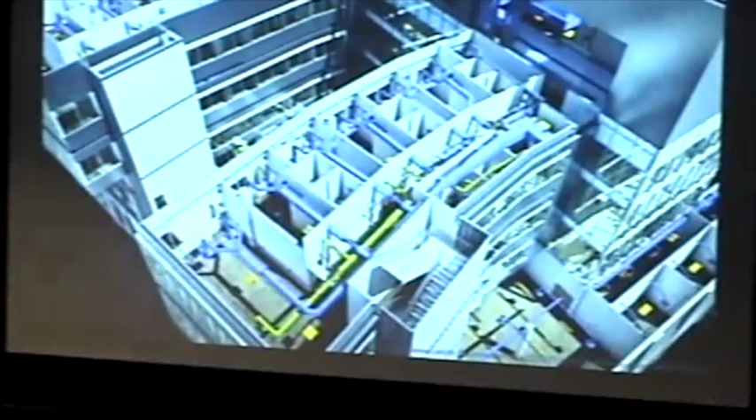From one side, we've tapped into building information modeling. I know Gustavo is offering a course on BIM. What we've seen as an opportunity is the fact that these models are around every job site. What we want to do is extend their application, use them as a baseline for constructability by tying them into our production schedule, so every day you would see what is expected to be done on the job site.

On the other hand, we love to tap into visual data. By visual data, I'm referring to six kinds of visual data. On every job site, you can walk around, use your smartphone and take photos. These days, we see professional photography companies showing up on job sites and taking thousands of photographs.

Using time-lapse cameras is pretty common—we usually see one or two of these cameras. It's also becoming common to use action cameras to walk around and videotape work locations. Drones over the past two years have far exceeded our expectation of technology adoption; construction is actually the largest market for application of drones in the US. We also see laser scanning devices that are dominantly used for quality control purposes.

While all this data exists on our job sites, it's not actionable. It's not yet telling us how much work is happening on the job site, so it can be used as feedback to our project schedule.

So our point of departure, based on this workflow I showed you from planning to monitoring and control, really lies in developing a visual production management system. This system has three capabilities.

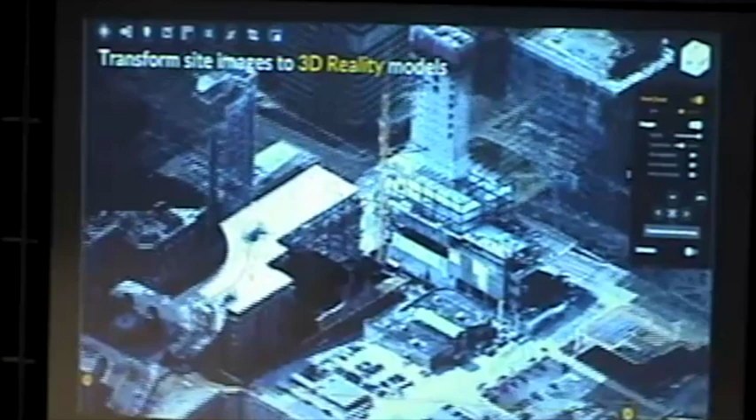Over the past almost 7 years, we've been working on a number of algorithms that consume your images and videos and can automatically generate a model like the one you see on the screen. This is actually a $750 million project in St. Louis, Missouri. This happens to be a high-rise structure as part of a campus, and you see a three-dimensional model that's been automatically generated from photos.

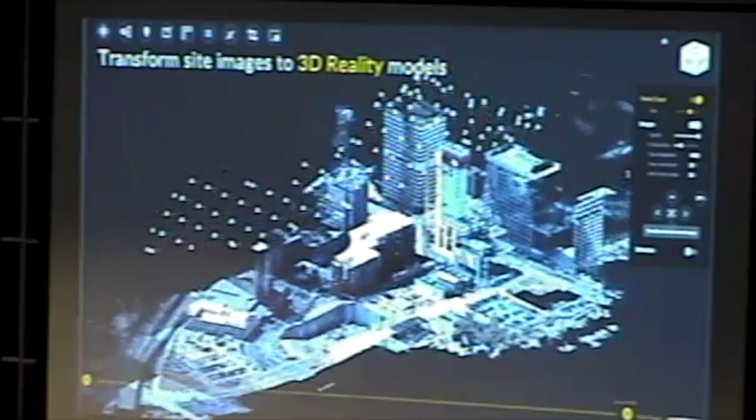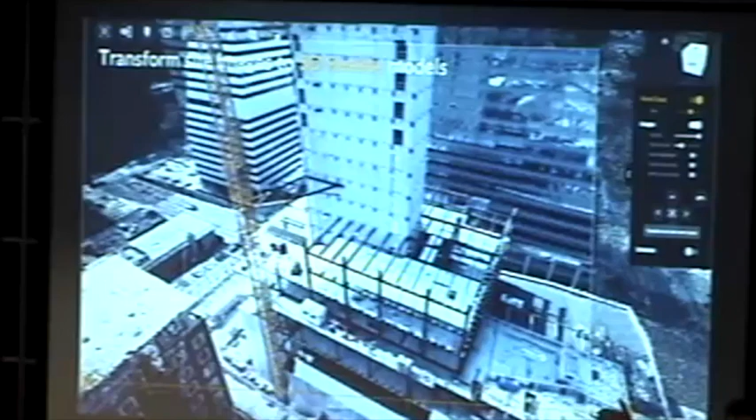These photos are actually captured with a drone, so you can see a lawn mowing pattern. You can also see images captured on the site. We take these images, place them into the system which automatically processes them on the cloud, and it can automatically generate models. With a click at a given location, you can find that image.

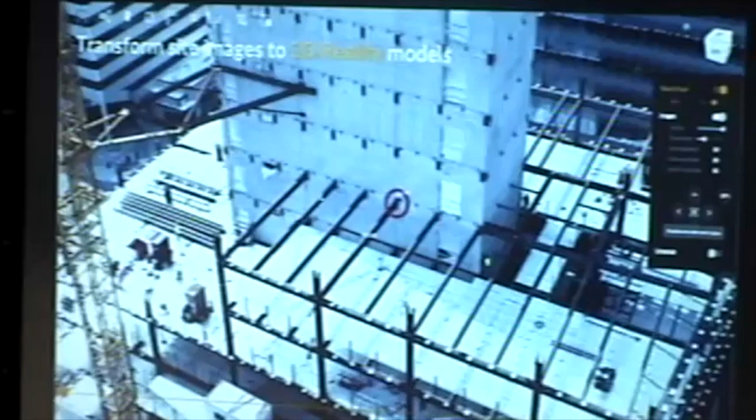Now you can take people who are off-site, walk on the job site, click on any desired location, and do angle measurement, linear measurement, area-based measurement, or track volumes.

So again, taking your photos and videos, automatically transforming them into models.

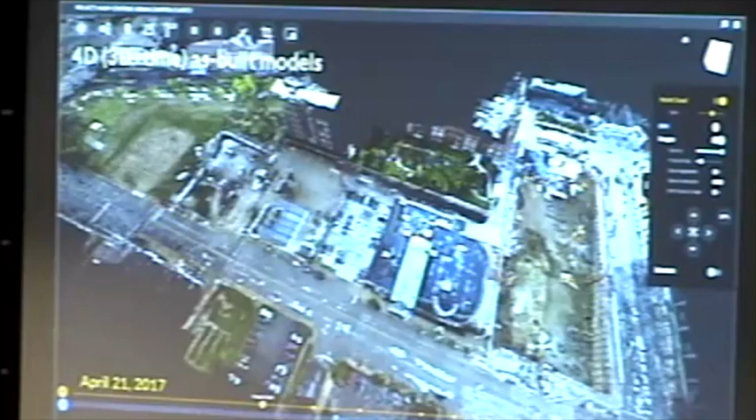Now, obviously, the project doesn't stop in one photography session. We keep making construction progress, so we need to keep documenting. As part of our algorithms, we've also worked on a concept we call 4D as-built models, 4D for 3D plus time. That means every so often, depending on pace of construction, you can walk around the job site, use your phone, take photos. We automatically generate models, and we automatically bring these models into alignment.

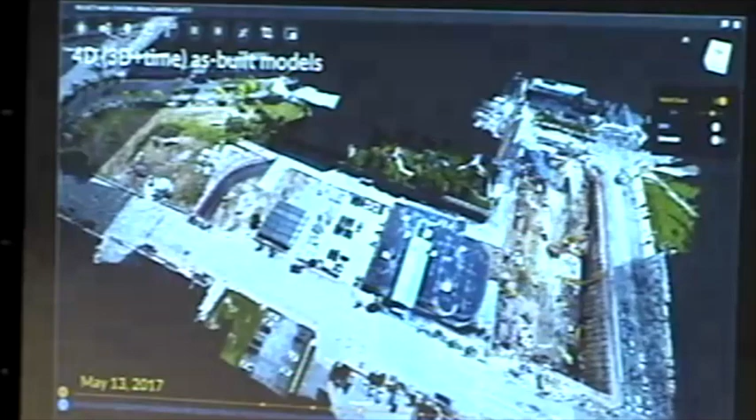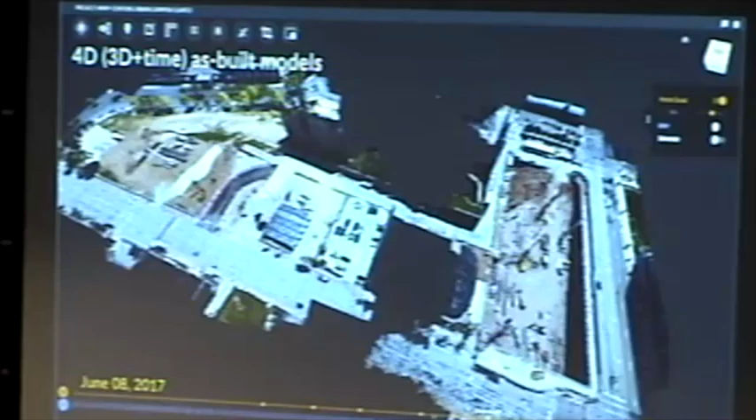So I'm taking you to May. Let's go all the way to June—less photographs, but these models are automatically aligned. Let's go a little further to halfway through June. Now I'm showing you July, August, late August, November, February, and probably this is the latest snapshot I have from the job site. So again, without using GPS, without using any location tracking, purely based on the content of the images, we want to see if we can generate these models.

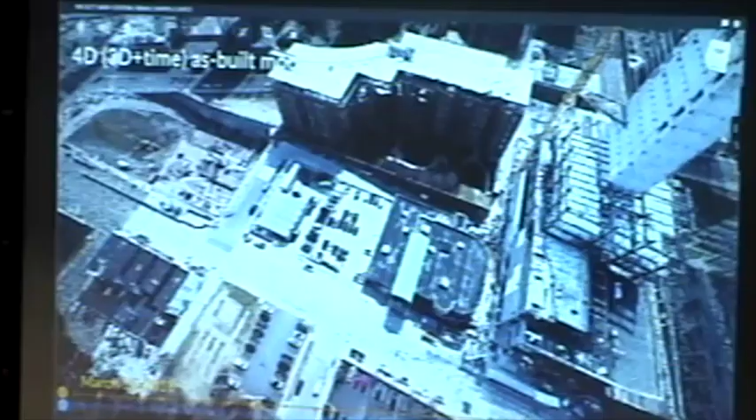So how do we achieve this? I don't mean to get into a whole lot of technical details here, but I'm just going to give you a high-level overview of what happens. We're taking these images, usually captured in orders of tens or hundreds of photos. These photos actually have a number of overlaps. So let's say if you have image 1, image 2, all the way to image n, we use computer vision algorithms that have the capability of finding distinct visual features.

We work on algorithms that can match them in a pairwise fashion, pruning out the errors using fundamental matrix. We've used a number of optimization techniques as part of a technique we call structure from motion that has the ability to generate 3D models.

By no means do I mean to get into the details of it. We have a number of publications in this space that anybody interested can look into. We've been able to prove that these algorithms, compared to the dominant methods used in computer vision, can achieve an order of magnitude faster performance.

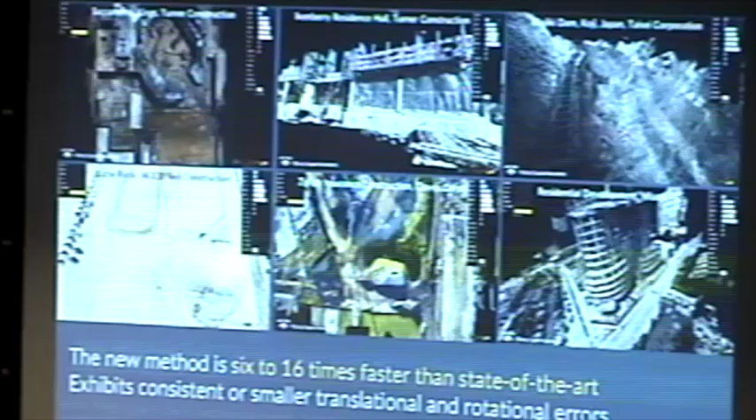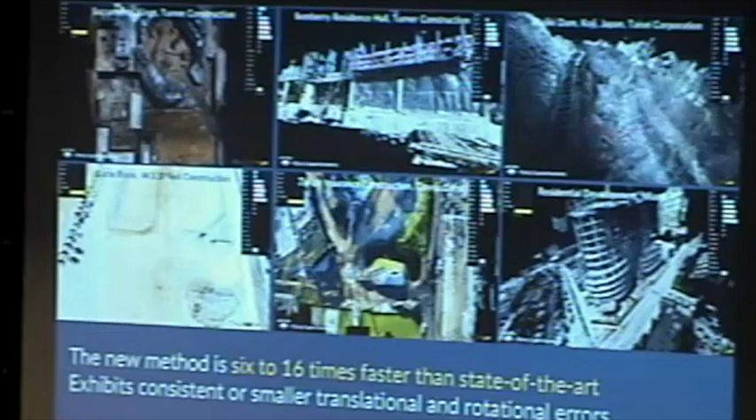What it means is that we've applied it over the past few years to hundreds of job sites, and we've been able to demonstrate that our method is somewhere between 6 to 16 times faster based on the algorithms we're using, and it actually shows less error if you decide not to use GPS and location tracking techniques.

But we don't stop there. The whole goal of taking visual data and generating these models is to track progress. Our intent is to see if we can contrast our planned models versus reality. But before we do that, we need to bring these two models into alignment.

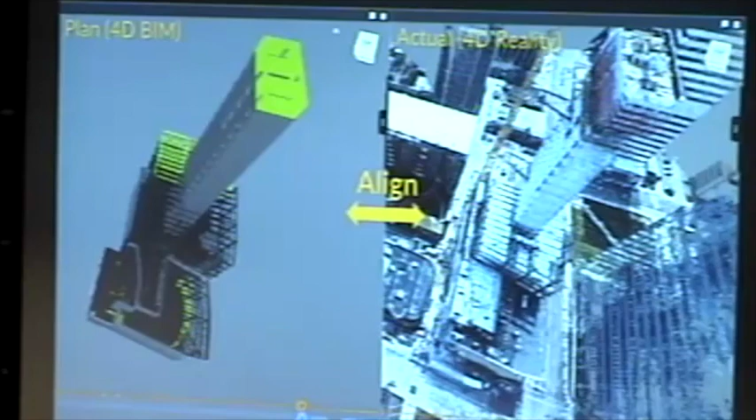The alignment can be completely automated if you're using survey control techniques. It can also be interactive based on the number of features that the user establishes. What it means is that for the first time, when you start using a system like this, a user would...

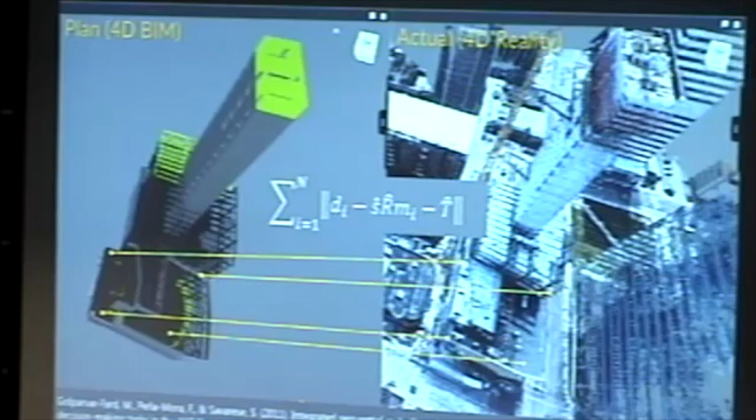Select a number of corresponding points between the model versus reality on the job site. Then we solve this least square problem that you're seeing on the screen, and we're able to bring BIM and point cloud into alignment.

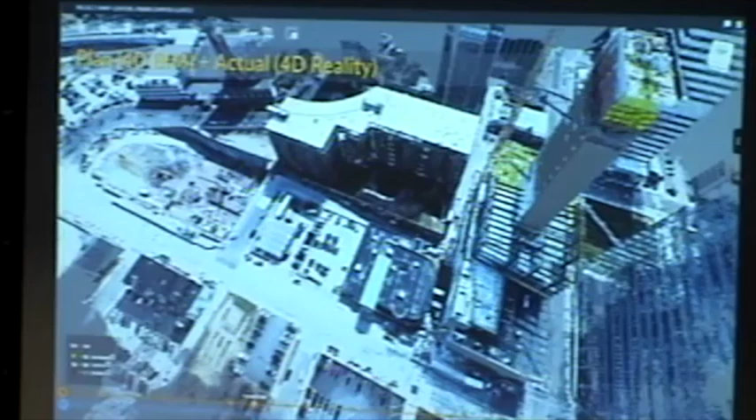Once this is done, because all of our point clouds are automatically aligned, every point cloud you have in the future will also be automatically aligned with respect to the first model we started with. So what does that mean? It means every single photograph you have on the job site is now automatically mapped into your BIM.

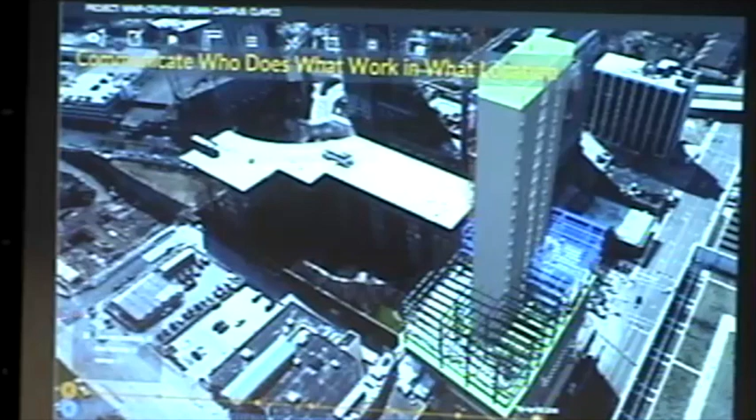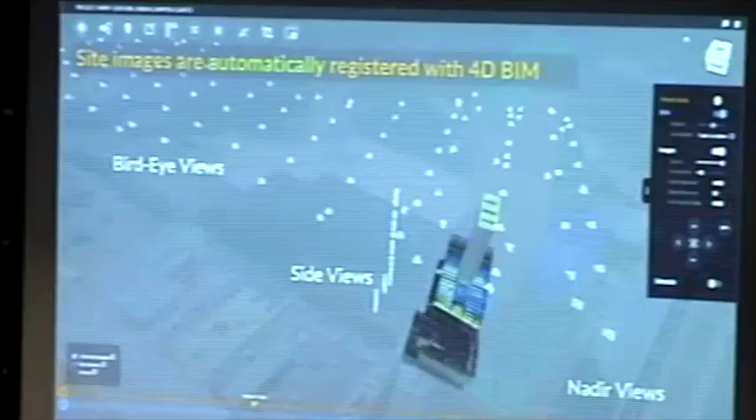Now this applies to every single image. So you can use this for every bird's eye view that you have from the top, your drone, any side view you capture, or even walking around with a smartphone capturing photographs.

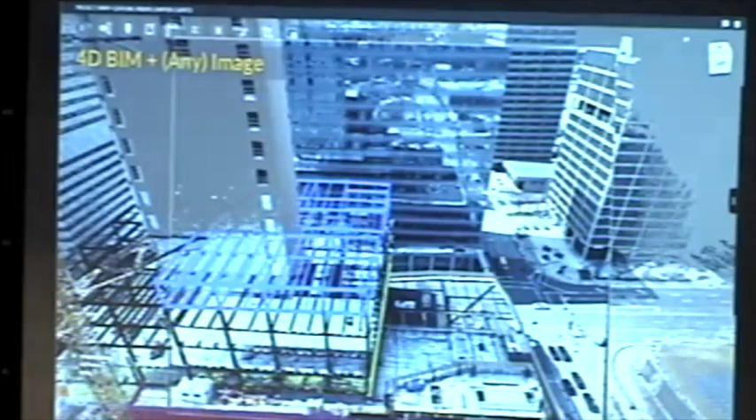So I'm going to show you some examples. Let's imagine we go into one of the site images and want to see the site. You can go into any image you desire, get access to the photograph, see the model overlaid on it, and the model carries the same colors.

Now you can use the visual context for things beyond tracking progress. For example, you can use it for managing issues. By issues, I'm referring to RFIs, requests for information. I'm also referring to quality items, or even safety.

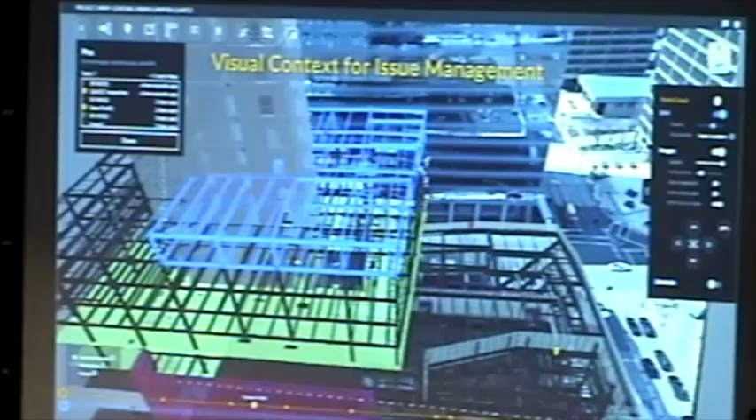You can pin various locations to minimize how much time you spend coordinating these issues with different contractors, architects, and engineers on your job sites.

You can simply mark up, and we also have capabilities of sharing these via text message. It actually works internationally, so even if you're in Mexico, you'll be able to take a screenshot of the system at a different location, put a number on it, and share that with your project team.

So all of this is obviously coming from a schedule. Over the past months, we've had the opportunity of joining Oracle. Oracle is the company that offers Primavera P6, the dominant scheduling solution, and we've been the first startup company to be accepted into their scale-up.

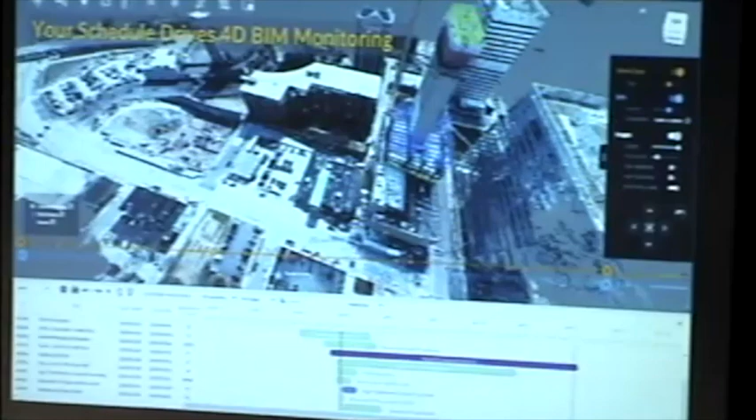What it means is that we will tap into the same schedule that construction companies have. We bring that into alignment with our model, so now you see the same model with the same colors reflected in the schedule. Every day you can see who is expected to do what work in what location, and you can contrast that to reality.

Because we take advantage of BIM, we can automatically extract quantities. So we can benchmark how much work is expected to be done, and use that as a basis for BIM-based tracking of progress.

We can also organize your tasks in the form of workflows. What are the tasks happening across locations? Show the tasks that every company is doing across different locations, and use that as a strategy for your superintendents to more proactively manage projects. Obviously, this is a holy grail that we want to get into.

We've been able to bring BIM and reality into alignment, so I want to see if we can color code locations as to whether they're on schedule or behind schedule. Now I'm going to get into a little more technical detail. We wanted to do this automatically, so naturally the question was, how can we automatically compare our point clouds against BIM?

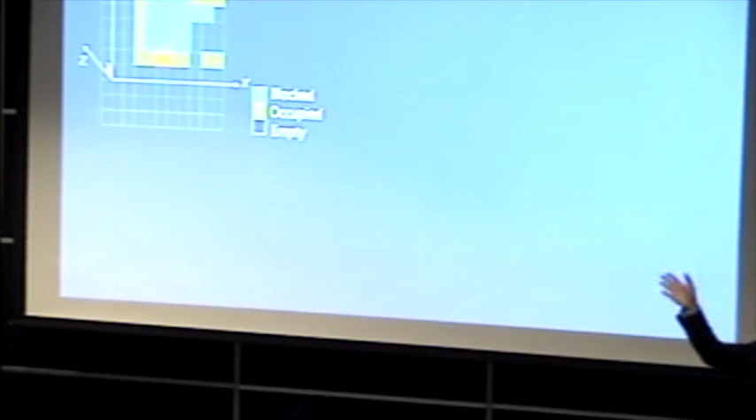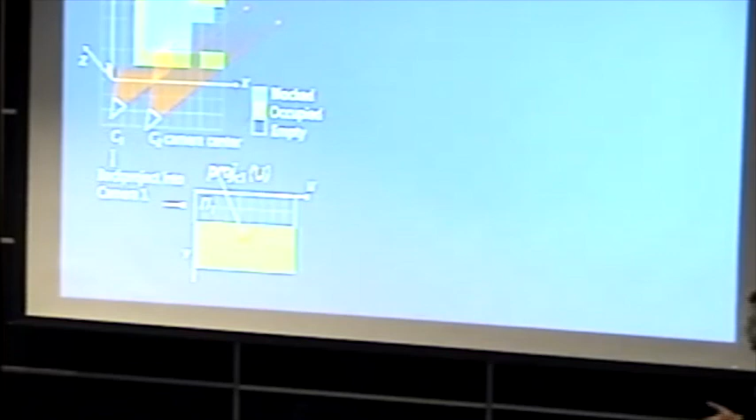The first thing that comes to mind for civil engineers is to tap into geometry, so we started working on a number of machine learning algorithms. Imagine you're looking at the building from the top - this is a plan view. What you see in green happens to be the building walls. We've actually quantized this scene into voxels, and we reason about occupancy and visibility of these scenes by back-projecting our BIM into our images.

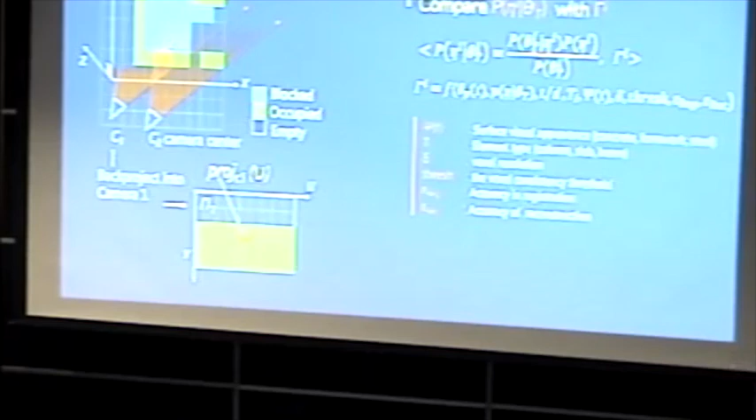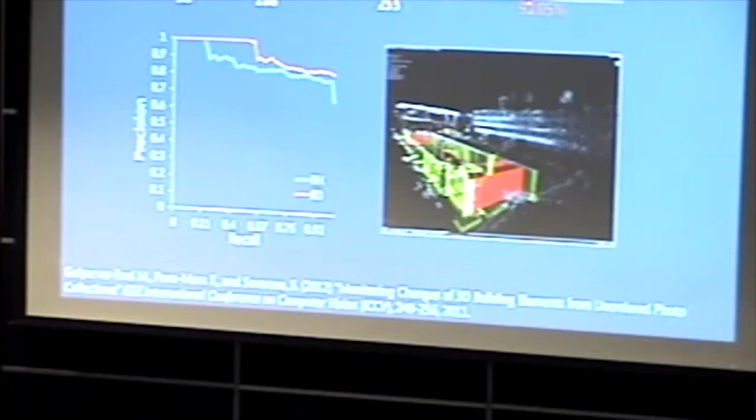I don't mean to get into formulations and details here, but we use a number of machine learning techniques to understand the expected visibility of every element versus the reality of it. We put this into a machine learning algorithm, train a hyperplane that can tell us if the element is on schedule or not. This is actually a paper we published in a computer vision conference, and out of this work, we're able to show that the accuracy of our automated detection is somewhere between 80 to 90%.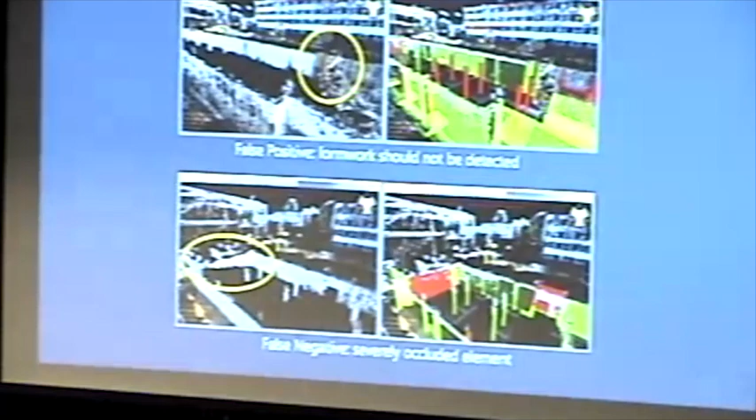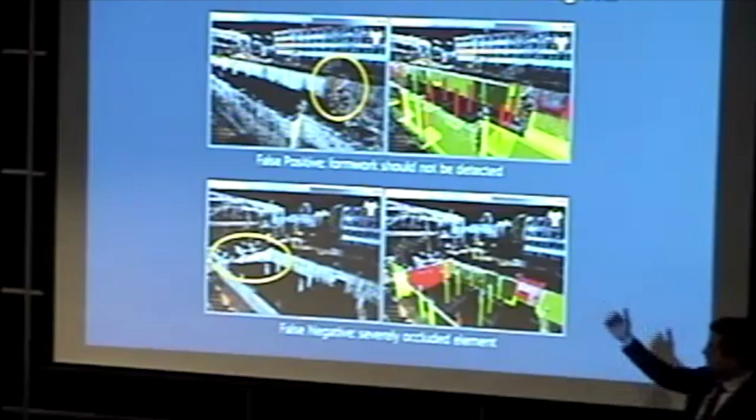Now, these numbers may look great to you, and you say, well, this is a good starting point. What are the challenges? I want to show you two types of error. When you use geometry, the system can actually make mistakes in recognizing construction components. I want to show you an example of a false positive - our system was purely reasoning about geometry.

It looked into that concrete wall - that piece is under construction, right? You see formwork. The system automatically color-coded that in green because it doesn't have the ability to differentiate between concrete versus formwork, versus reinforcement bars. Here's a second example - it's a false negative. We had limited visibility to that element, so when the system was making an assessment of how much progress was made, it made an error and obviously color-coded the element in red.

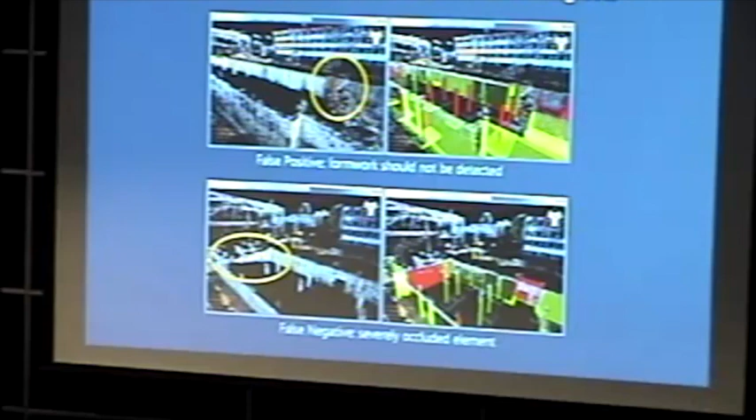So once we were able to accomplish geometry, the second natural question for us was, can we tap into the content of the images that we have and see if we can automatically contrast and identify construction materials? What do I mean by that? Imagine you have a picture like this - we want to see if we can automatically identify concrete versus waterproofing versus insulation, and not only detect that automatically, but use it to infer the status of progress.

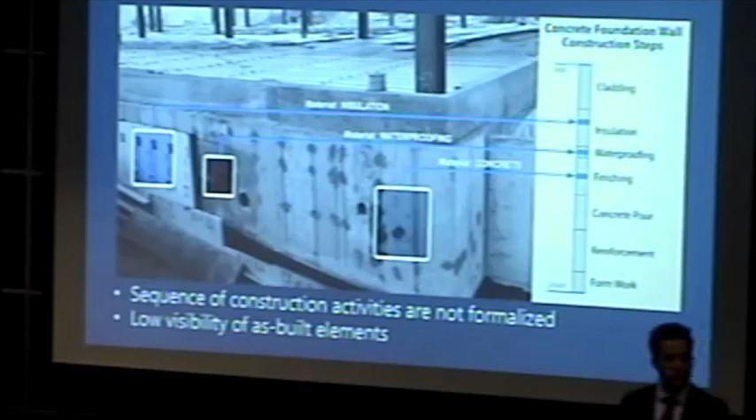But we have two problems. One, this requires us to understand the means and methods of construction and formalize these techniques. This might surprise you, but after these many years that we've been practicing and teaching construction, we haven't yet formalized these techniques. So we started looking at that as a starting point.

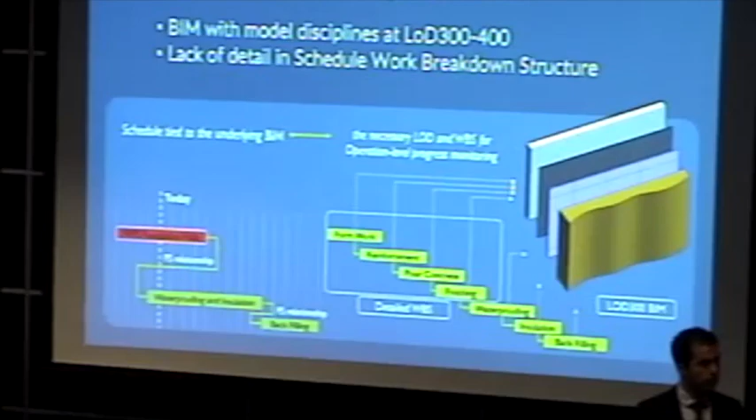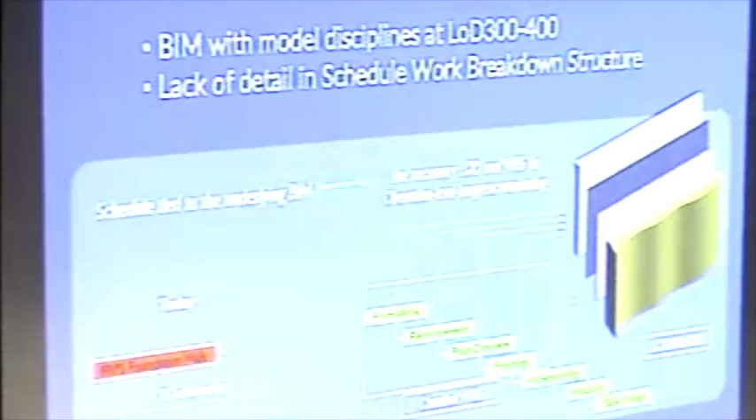The second issue has to do with BIM. When we look into BIM, a lot of the models we receive are usually design models. These models only stay at what we call level of development, or LOD 300 to 400, meaning they don't reflect shop drawings - what we actually build on the job site.

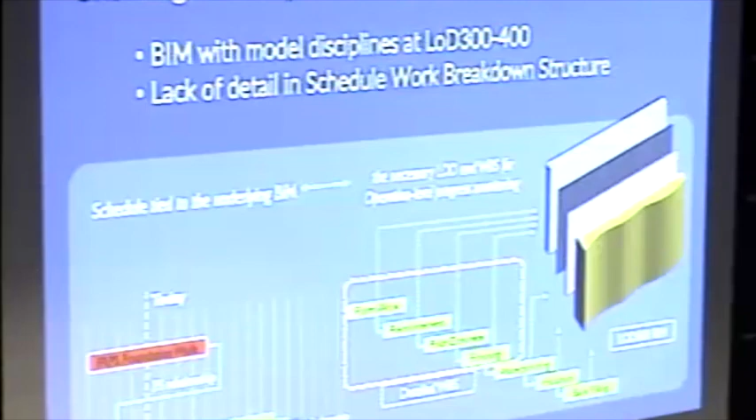The second challenge is the schedule. A lot of our contractors create master schedules without exposing the details necessary for progress tracking, so we don't understand what the expected material is that we need to be recognizing for every given component. To address this issue, we built on previous work and came up with a very simple concept - now we have our images aligned with BIM.

Why don't we automatically back-project our BIM into the same views that we have for images, and go ahead and extract relevant parts of the image? So for example, you're looking at element number 99. This is our camera number 5 out of 100 images that we have. This is element 112, and we do the same for the content of the visual data.

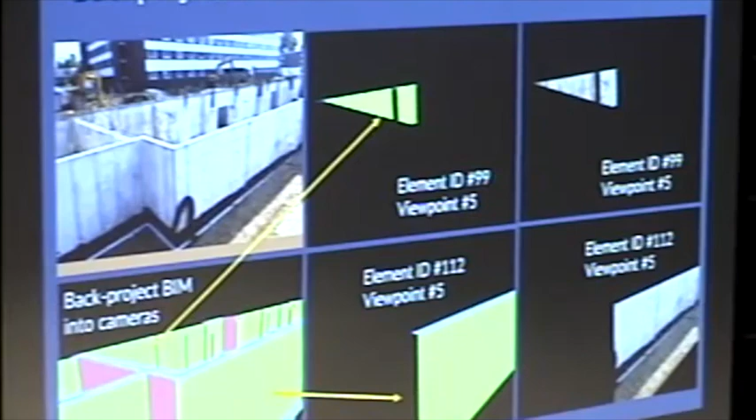Now the question becomes simpler. We want to see, by looking at the image patch, would you be able to automatically recognize that you're looking at concrete? Now we had an opportunity here: the fact that we actually have tens or hundreds of these photos.

What that means is that probably every single element you're looking at will be visible from multiple photographs. So one element can be back-projected into 4 photos, allowing you to make your recognition 4 times. As part of that, we decided on a strategy of back-projecting every image patch, extracting square-shaped images. Now your problem is: can you take any of these image patches, feed that into a material recognition algorithm, and tell us whether you're looking at concrete versus insulation versus formboard?

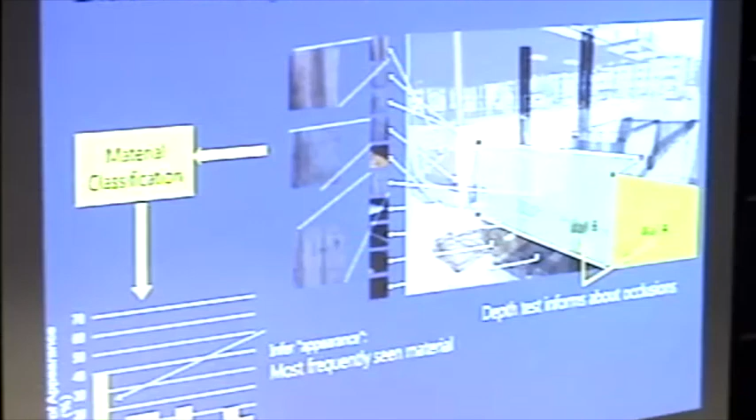We understand that some of these techniques will not have perfect performance, so we want to tap into frequency of observation. Whatever material has been most frequently observed is the one we're going to recognize.

Again, I don't mean to get into details. This is a paper we published in the Computer Vision and Pattern Recognition Conference last year. It taps into a technique called deep learning, and the basics behind it are really simple. We look at texture, we look at color, and we look at the geometry of the scene, and we see if we can dynamically learn models that can differentiate construction materials.

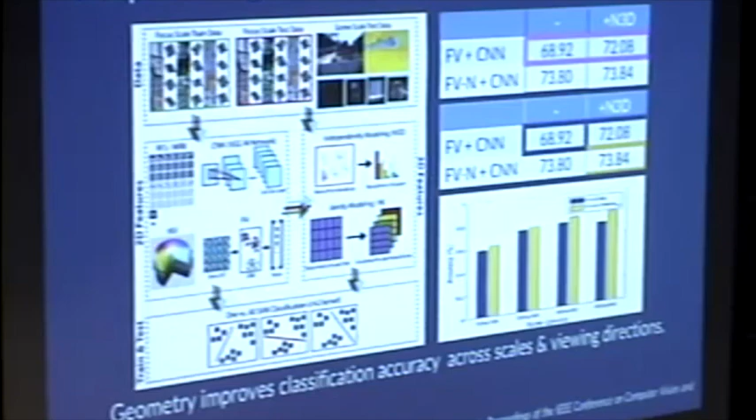So if you're interested in tapping into this work, for the first time we've publicly released a dataset captured over 3 years on tens of job sites, giving you access to photographs of 20 construction materials. These photos have been captured from various viewpoints, showing different kinds of construction material, and even the code you may want to use for your computer programming is being provided to you.

But what does it really mean in terms of performance? We've brought that back into our construction material recognition, and now we've shown that we have the ability to further improve our accuracy in identifying state of progress automatically. An average of 4 different case studies we've done shows the number is closer to about 90%.

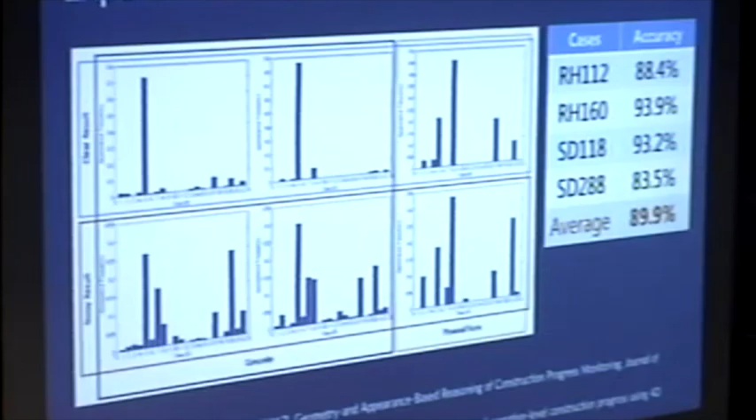But we didn't want to stop here. Naturally, when you have photographs, you would always have a number of elements that are not fully visible to you. You might look into a column or a wall and only see one side of it, or part of it may be occluded.

So we actually tap into some basic knowledge we've had in construction. We always follow certain formal sequences in construction. For example, if you're looking at this foundation column or foundation wall, you would see that the wall or column would be supported by a foundation. So if you have the ability to automatically recognize that column, because the relationship between these components is 'supported by', you can also infer that the footing should already have been constructed and in place.

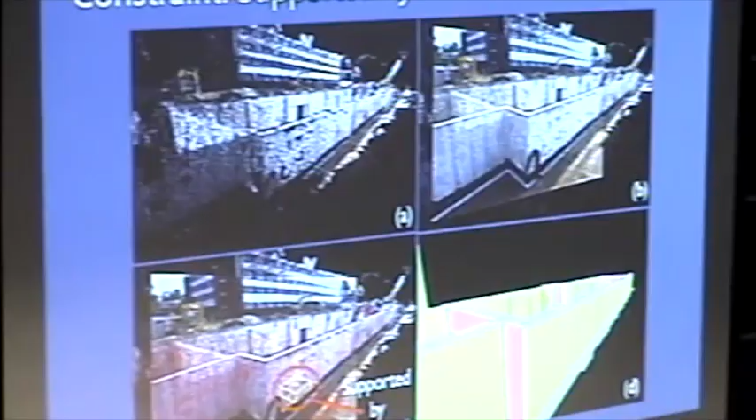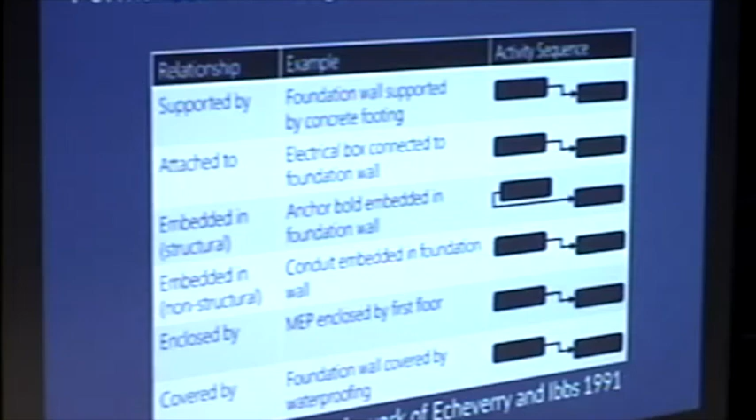So we wanted to tap into this. We looked back into some classic work done at the University of Illinois back in 1991 - Diego Echeverry, who was at Monterrey Tech for a number of years, with Bill Ibbs, currently at UC Berkeley. They formalized a sequence of relationships between construction activities - activities that support one another, elements embedded into others, elements that are attached - with the goal of using that to better infer automated tracking of progress.

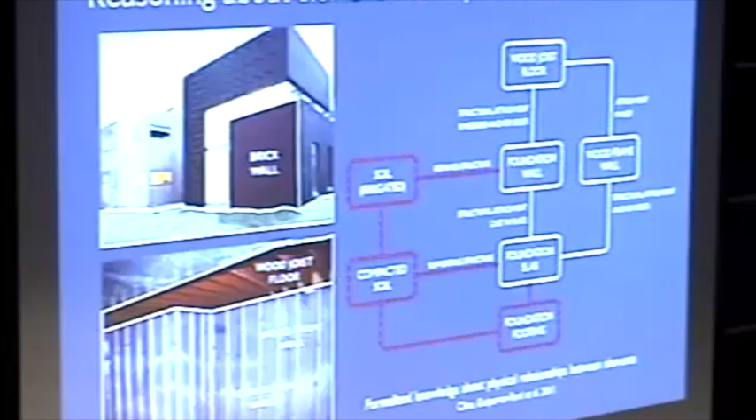Then we tapped into BIM. For those familiar with BIM, we looked at what we call IFC, Industry Foundation Class representation, to see if we can automatically reason about these relationships from our models, and bring that into alignment. We're showing a rather newer paper demonstrating that if you also tap into this formal knowledge of sequencing and a reasoning-based method in construction, you can further improve your detection capabilities by another 5 to 6%. Now you're getting to a range where automated progress tracking makes sense, and construction companies can start using them.

So what does it all mean?

Now we can give you a timeline that would be automatically color-coded, a timeline that will show you what is happening right now visually, so everybody would be able to understand, and a timeline that is actionable, because you don't have to wait for an entire week to really understand what is happening on your site.

Now I want to take you to the next step. Obviously, we didn't stop here. We want to see if we can proactively identify risk in the future. So when Gustavo was spending his time at the University of Illinois, we initiated another opportunity, which was how do we transform our practices today that are reactive and develop new metrics for tracking progress that can identify risk in the future. And as part of that, for the first time, we are introducing a new metric that we call task condition readiness.

How ready a task is to start on time in the future. So how can we predict reliability and readiness of tasks in the future? It's really a function of three things. We try to track progress and productivity of every trade. We try to learn that over the execution of the project, and we're looking to reliability of them responding to your RFIs, quality issues, safety issues, and even being able to satisfy their own requirements.

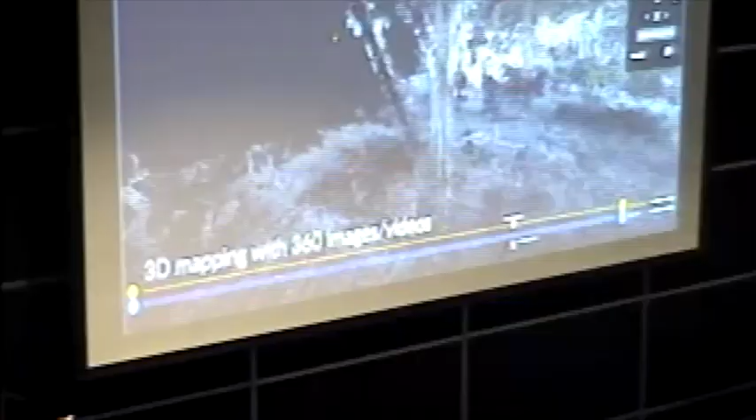How many of you have seen cameras that do 360 photos and videos? Or maybe you've seen them on Facebook, right? The idea is to take many of these images, automatically place them into a structure-from-motion algorithm, and now you can transition between these images automatically, with the geometry in the back of it.

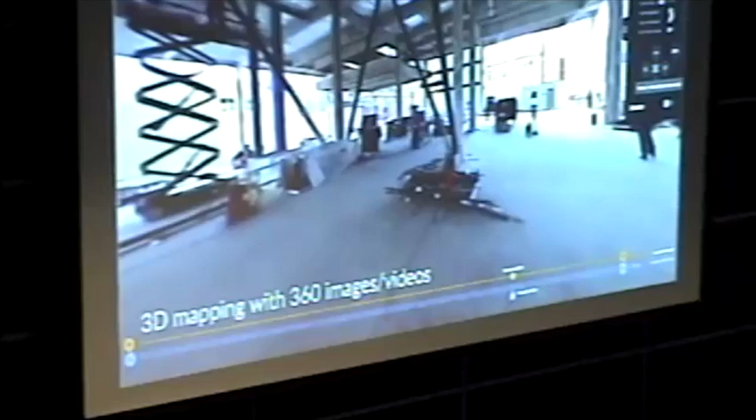So you see there's a point cloud in the back. On purpose, I'm showing you a really poor resolution video to show you that it doesn't really matter what you have on the job site. As long as your visual data has overlap, we'll be able to use that to generate a model like the one you see on the screen.

Say, what about the other modes of capture? I want to touch on iPhone or smartphone-based capture. You can also walk around with your phone, take photos that have overlap, and now we can give you transitions between photos automatically. All these photos are mapped without using any GPS, without using any location, giving you the ability to perform monitoring.

Here's an example of laser scanning. We can also use that and bring it into alignment. This is an example of what we call RGB plus D - R for red, G for green, B for blue, plus D for depth. It's a different type of camera that can provide you with very high fidelity of view.

So we want to see if we can tap into all these kinds of visual data for mapping indoor environments. Now, for some job sites that may not be interested in taking these many photos that we need, we also offer a different strategy, which is helping them with hotspots marked on 2D drawings, letting them walk around the job site and take photos, videos, or 360 photos.

We've even taken one further step, which is auto voice transcription capability. You take a photo, you directly talk to the app, and our machine learning algorithm automatically transcribes your voice into text. It actually works in Spanish too.

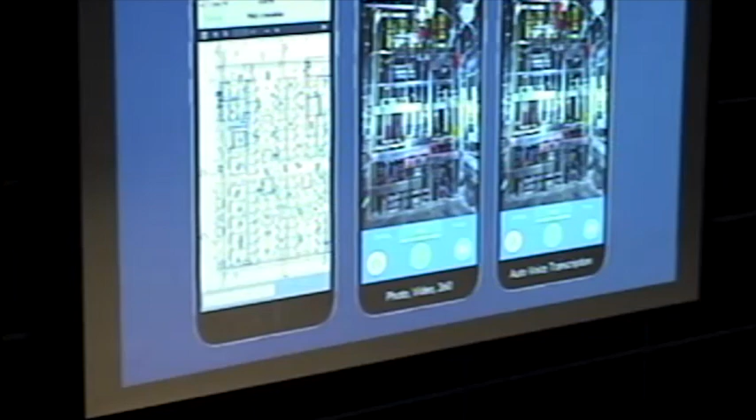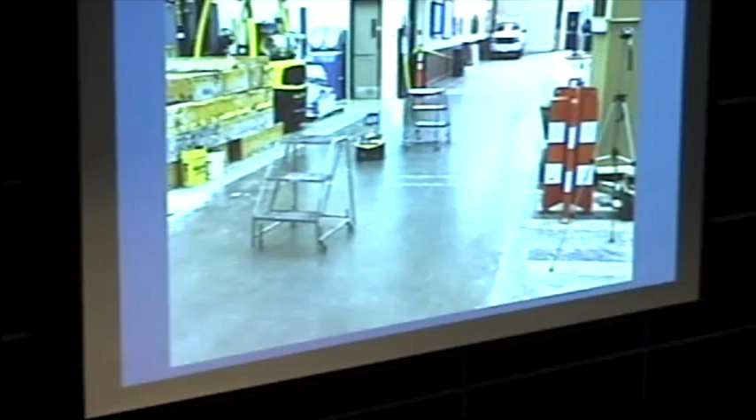When we started working on this, it may surprise you: Turner Construction, the largest construction management company in the US, and DPR, a leading company from the West Coast, approached us and said, what if you try to automate the process of data capture? So we put together a team at the University of Illinois, and this is a prototype, not yet a solution that we commercially offer.

We created a new ground robot—not the hardware, but rather the operating system—that is operated manually for the first time by a superintendent. You see there's a device sitting in front of it. That device does a visual capture of the scene.

We automatically learn the map, and this robot can follow the map over and over automatically for you, so you'll be able to capture the same floor repeatedly. If you're doing drywall construction, or installation of mechanical, electrical, and plumbing components, you can let the robot walk around the room and do the capture.

How many of you have seen Roomba, the robot that goes around and does the vacuum cleaning? It's the same concept—a robot that walks around the job site does your inspection for you.

Now I'm just touching on a few other items we've also done. As part of our work, one question being asked was, how do you guarantee completeness? Today, a lot of job sites want to hire drone operators. Especially in the US, we have regulations by the Federal Aviation Administration that require somebody to preserve line of sight, meaning for every capture we have to spend hundreds of dollars to bring somebody on the job site to fly the drone for us.

So how do we guarantee that this person who shows up on the job site would actually be able to achieve accuracy and completeness of the capture? Are there techniques we can create to guarantee that?

So what are the two problems? Often when we go on the job site and do these captures, we come back realizing there are holes in our models, and we don't have time to go back and capture them. Or we generate models where our algorithms fail to find the optimal point, getting stuck in local minima and generating drift. I wanted to see how we can dynamically address these issues before we actually leave the job site.

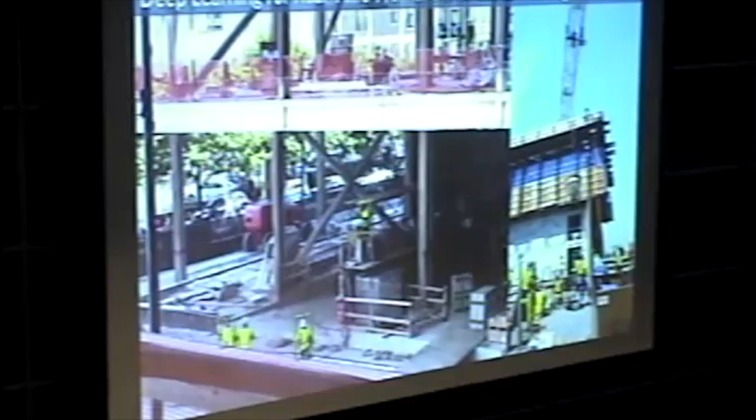So now you get a lot of imagination. You can start using this for safety. You can think about the implications of this for productivity and the interface between the two.

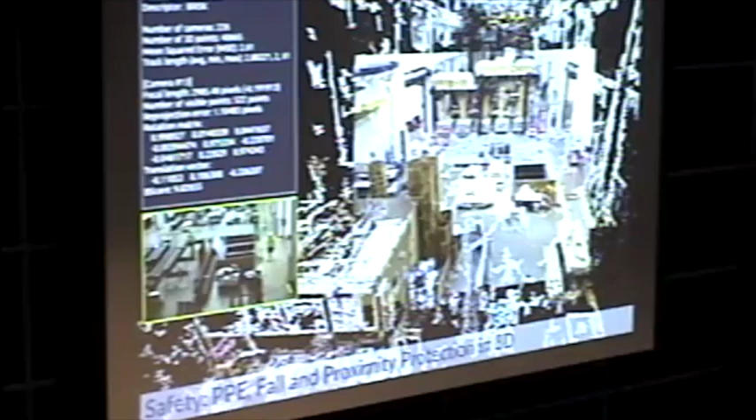So naturally, when we demonstrated this to some of our industry partners, one of them, Turner Construction, asked if we could help detect workers who don't have safety vests and hard hats. So we developed an algorithm, which is what you see in that little video. The moments that workers don't have safety vests and hard hats, a red box will appear indicating these workers.

Because we have the geometry of the scene, we can also map the location of the workers. We can show you X, Y, Z where these workers are located, so your safety engineers can log into a system and say, I see an opening here, can you measure exposure of my workers to this safety hazard, can you give me spaghetti maps of that? So that's another element of this.

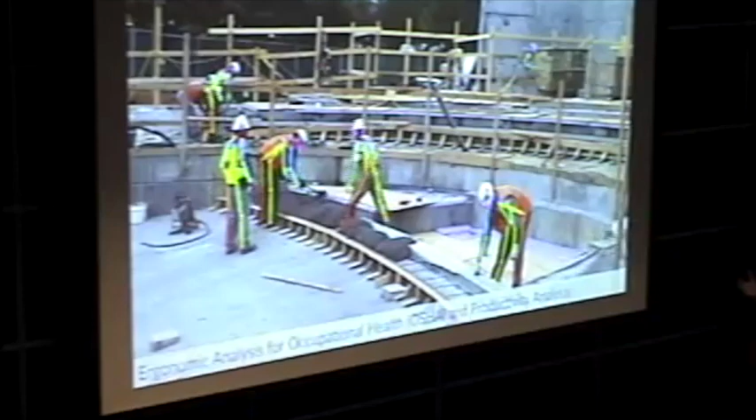Lately we've pushed the bar a little further. Purely based on a video camera, we want to see if we can automatically detect your body skeleton. I don't mean to get into the details of the algorithms, we'd be happy to send you the papers, but the idea is simple: see if you can learn models that characterize body posture and in real time give you ideas about performance on the job site.

So what are the implications? Obviously insurance, ergonomics - you want to see what opportunities you have to understand body posture throughout the day, and maybe also productivity. Again, I don't mean to get into details, but here's an example of one of those algorithms we've recently published.

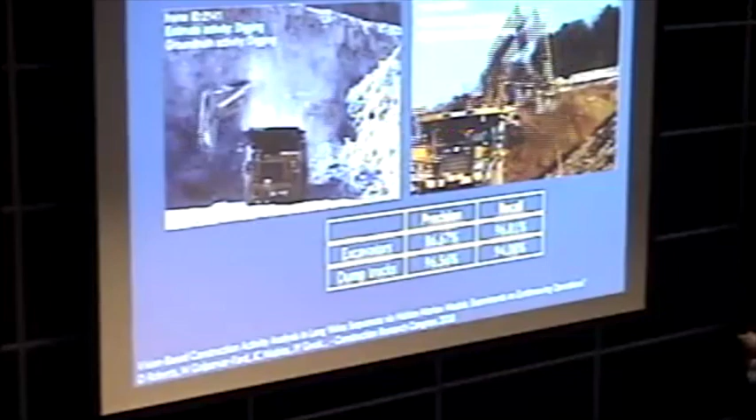Once we did this work, equipment manufacturers approached us. The number one was Caterpillar. They happen to be local to us in Illinois, so they asked whether we can apply this technology to construction equipment. What does that mean? They wanted to see if we can detect and track their equipment live, and automatically recognize the activities they perform.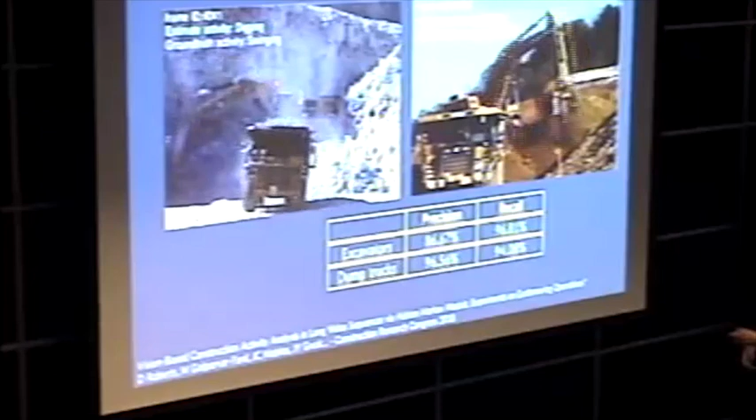These are two different sites, actually mining sites. On the left side you see CAT versus CAT. Over here, you see CAT versus a Komatsu machine.

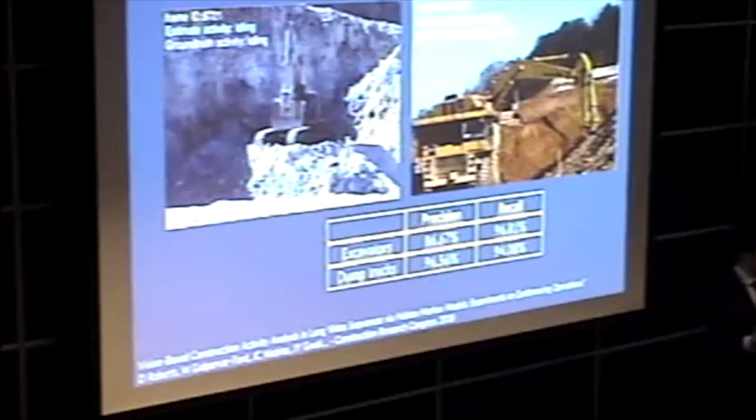So you may say, well, wait a minute - Caterpillar sells us telematics equipment. How many of you know what telematics is? It's a piece of device you put on your construction equipment that provides information about the health of the equipment. It's pretty expensive, usually somewhere between $50,000 to $120,000 per telematics device. And Caterpillar loves to sell every contractor in the world one of these telematics devices per machine.

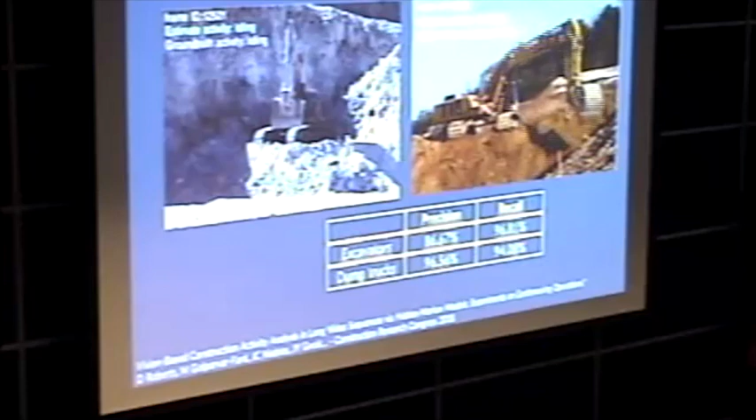But here's the challenge: no owners buy all their equipment from the same vendor. On purpose, when you go out and buy, you buy a mixed fleet - from CAT, from Komatsu, from Volvo. So the idea we had was to see if we can use video to automatically recognize not only how CAT equipment performs, but how competitor equipment is performing, and use that information to understand how much time is spent on idle versus digging, how much time is spent swinging, how much is moving.

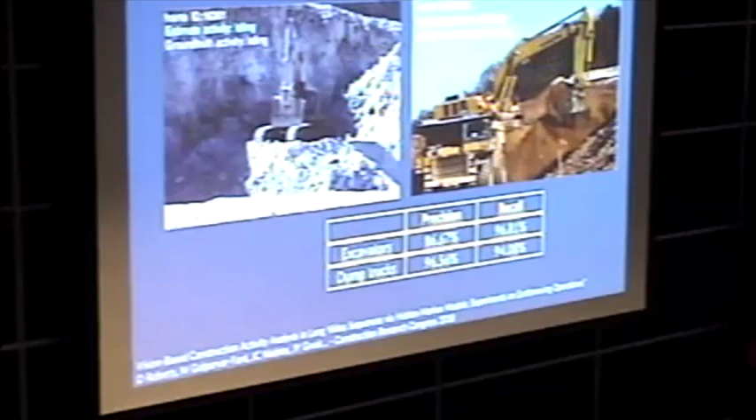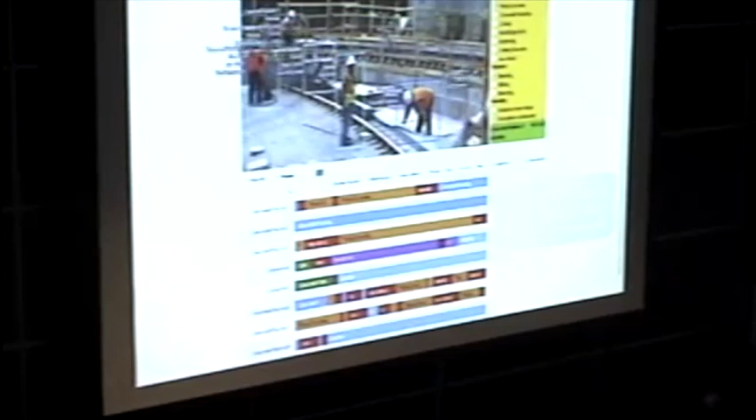Now you have actionable data that the construction equipment operator can use to improve performance. Obviously the natural question was, can you also do this for workers? The challenge is we don't yet have good data to achieve this fully automatically. But here's the concept: we can automatically identify roles of the workers, body posture, tools they're using, and sequence of construction activities. At the bottom of the screen you see what we call a crew balance chart, showing every minute what activities every single worker in the video is performing.

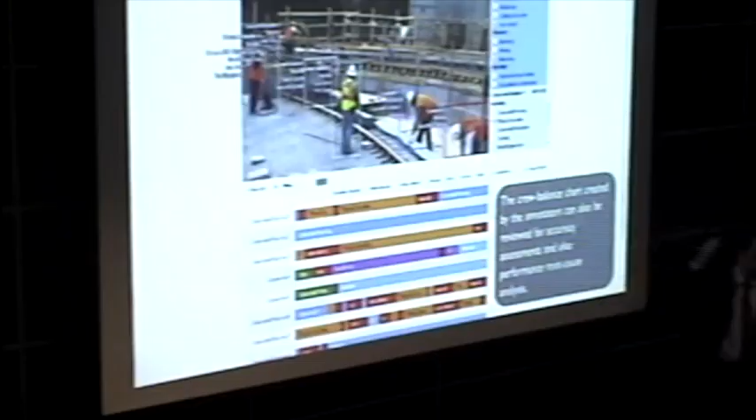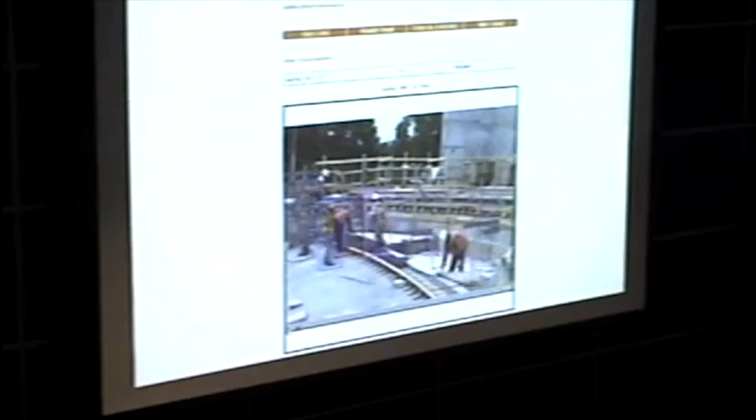So if you're a contractor, you simply upload a video, do what we call a first run study, analyze the sequence of, let's say, concrete placement, and see what you can get from it. Let me see if I can advance this a little further.

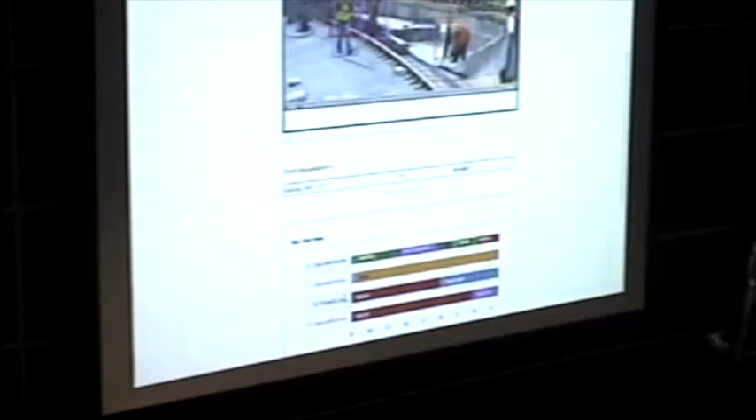It gives you a bar chart showing the sequence of activities being performed. And now I can also give you a pie chart, showing what percentage of time is direct work, how much time was spent waiting for materials, how much time was spent traveling because resources might be too far, and how much time is spent on tools and equipment.

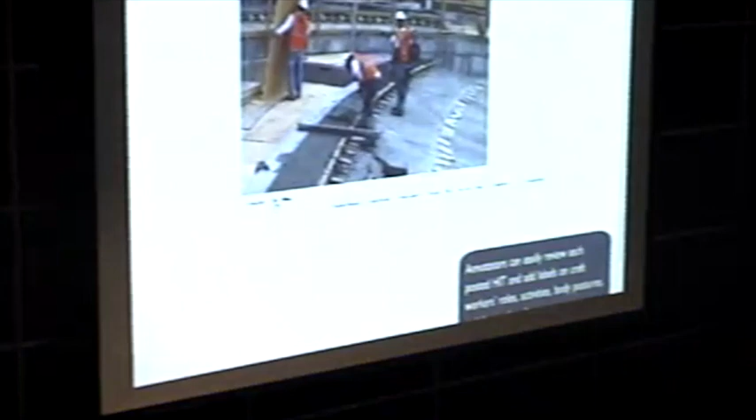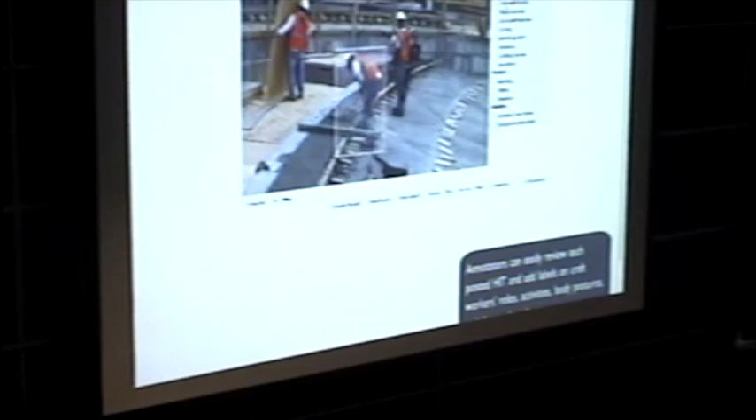Now you immediately get an idea. These guys are placing concrete, using a bucket and a tower crane. What if we changed that with a pump and start bringing chutes to place the concrete? Is that a number we're going to be looking at? Immediately you empower foremen and workers with information they can use to maximize their productivity.

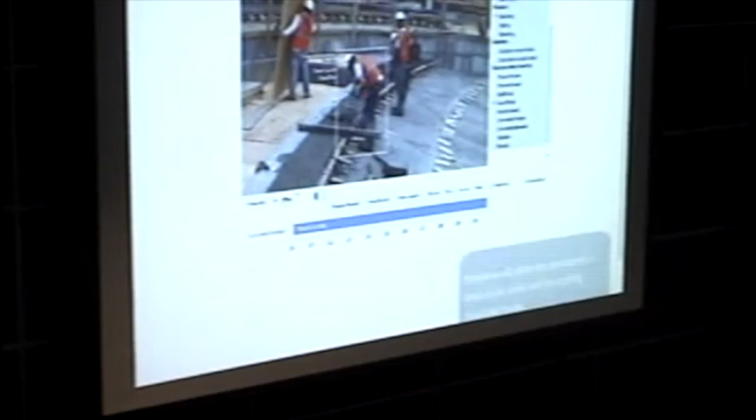I want to go back a minute and touch on the number. Maybe I can pause here. The number that you see here is 59% productive work. What do you feel about it? Is this a good trade? Is this a good crew that you're monitoring, or is it a bad trade?

It's actually a very good crew. Most of the job sites, when we monitor their activities, at best we can get somewhere about 25 minutes of direct work per hour. The rest is time spent coordinating tasks. So this is an example of a really good crew. The idea, again, is to empower workers with information they can use to improve their own productivity.

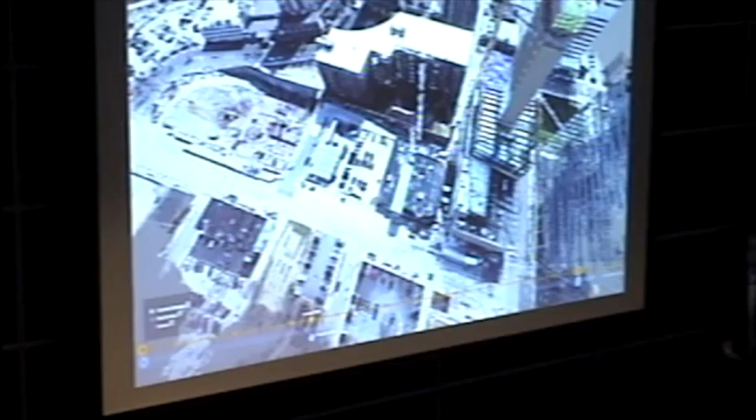So now I've shown you these works, I really want to summarize everything I presented with a few takeaways. I've just shown you how you can tap into your existing visual data, images, videos, plus BIM, to improve how we do planning, because now you have actionable data on progress, productivity, and risk, how we can better coordinate the schedule visually, and how we can streamline communication on and off site.

So a number of benefits you would immediately get from it. Number one is transparent process view. Everyone on job sites understands visuals. You don't need to spend time explaining people what they see in a photograph, so you can use that as an opportunity to eliminate problems in the future.

We can proactively highlight things that are at risk for delays. I showed you with statistics that in projects we've been engaged in, you can maximize your own performance by an order of magnitude by tapping into this visual production management strategy. If you tap into detecting and tracking workers, you can better plan your personnel and logistics, how we manage our job site, and what resources we need.

Streamline billing. I think this applies to a lot of contractors in Mexico. My understanding is that on every job site you have surveyors that walk around, monitor what happens, and use that to verify how much you have to pay contractors. Now you can go into the system, click on any desired work, see what the schedule dictates, find the photograph, visually verify that billing, and streamline that process.

Today, every subcontractor in the US is being delayed by almost 2 to 3 months on their payments. That's the national average, so you can minimize that time spent. That's why we've partnered with Oracle to see how we can integrate with a platform called Textura, which is used for managing payment applications.

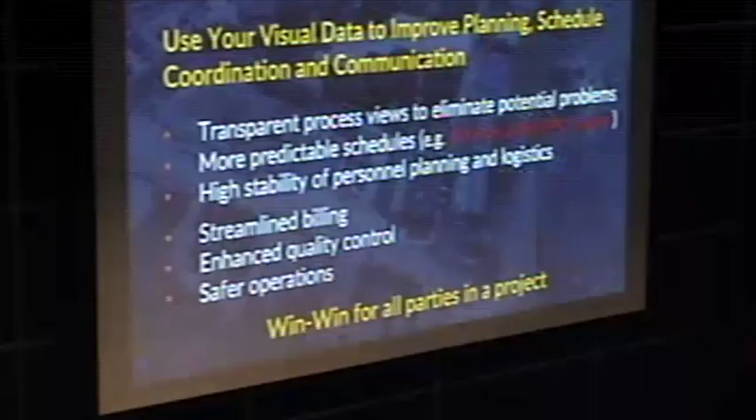Héctor: Yeah, thanks. Thanks, Mani, for your presentation. I just have a question regarding the quality control.

You mentioned we can use it when we compare with the BIM model, but I was wondering what is the level of precision that you can get from the model? I don't know, for instance, if you're comparing the location of a plate, or if you want to take into consideration whether a weldment was done correctly, or if an embedment was placed correctly.

That's an excellent question. So for quality control, I would use the words precision and resolution to explain accuracy. There are two elements to that. One is the process of capture. Usually the best visual capture device to use is a laser scanning device.

Most laser scanning devices can actually give you almost millimeter level precision. When I speak about millimeter level precision, I'm referring to laser scanning devices that cost close to about $100,000 to $200,000 - that's the cost today. There's an element of having two field engineers operate these devices, but it can actually give you enough precision that you can use it to even measure flatness. And there are a number of commercially available solutions that do that.

The second part of your question has to do with the contrast with the model. That really relies on the level of development in the model. Ideally, your model should be at the shop drawing level. That means for your structural component, MEP, ideally we would see LOD 400 level for these disciplines. Then you can take a base plate, look into reinforcement bars, and use them to contrast.